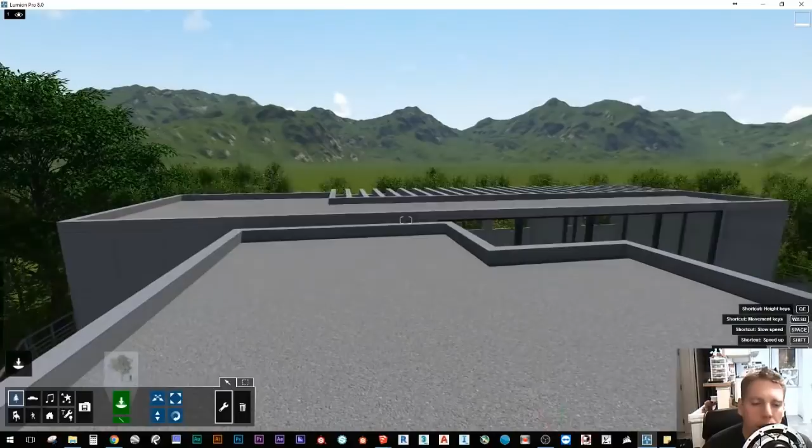So let's go ahead and jump into Lumion and take a look at this new feature. I'm going to show it really quick and explain a little bit more about it and how we're going to find some use. First off, we're in an example scene here in Lumion. I'm going to take this corner concrete right here.

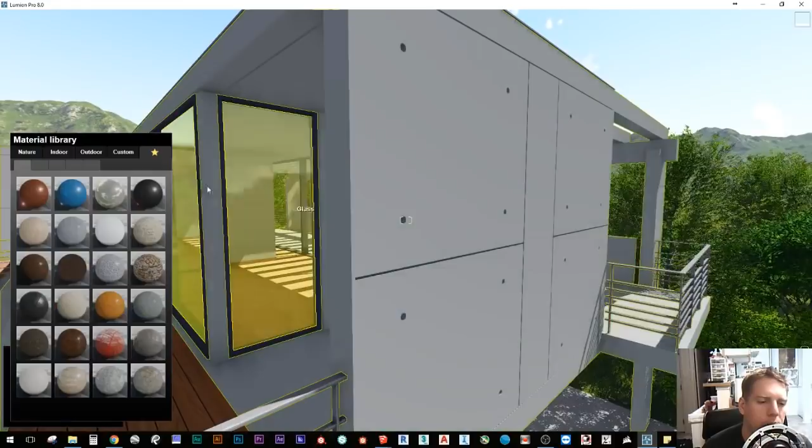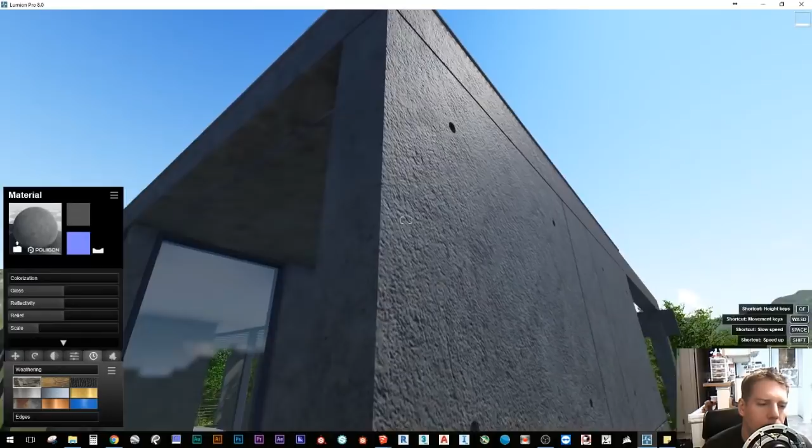Now we could pick any material in here, a standard material. In this case, let's go ahead and go with a concrete, one of the new Poliigon ones. Now selecting this material, everywhere there's edges that have this material painted on it, that's what we're going to affect.

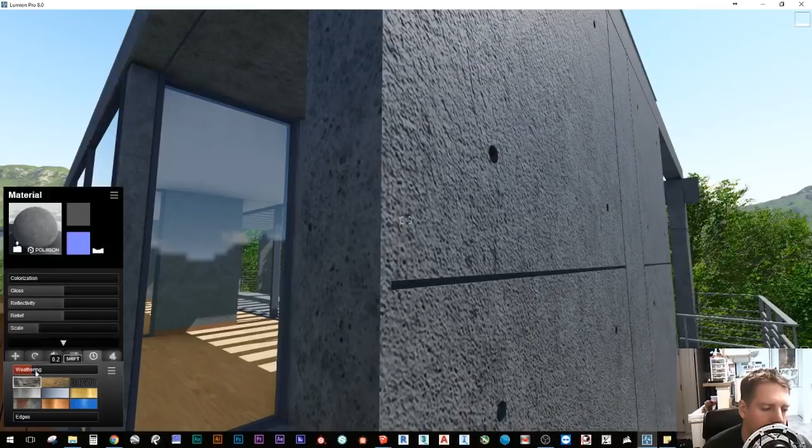So it works by material. Notice that we have perfect, crisp, fake edges here - that's definitely not something that occurs in real life. So here in the material editor, if you don't see these tabs down here, there's a show extended settings option. Make sure that's clicked, and we're going to head over to the little clock - it says weathering. Although we can weather like we have been able to since Lumion 7, let's get the scale down a little bit on there. That looks good. The slider right here for edges is right below - they just put that in there, and you are seeing the effect.

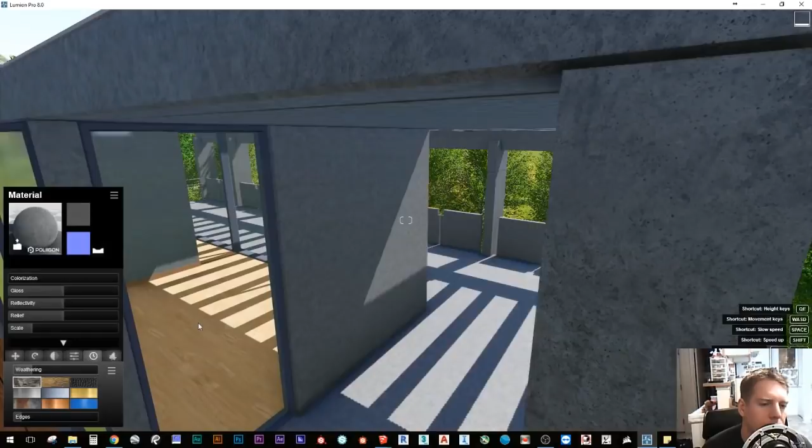Let's take a look at those circles where the snap ties go. So that's the effect. Now I'm going to talk about why this is so important and why this has really impressed me.

I'm going to be using it all the time. So I'm going to take a look at an article here. When I first started getting into rendering in Lumion, I looked up plenty of these articles that talked about how to increase photorealism in your projects, and a lot of them say very similar things. What you're going to notice on almost all of them, and in this case this is the first choice on their list, is you need to remove sharp edges.

It says bevel, bevel, bevel - whether we round edges, whether we chamfer them, whatever we need to do to make sure it's not a perfect crisp edge or razor sharp edge, because as it says here, there are no razor sharp edges in nature, and everything has some sort of curve to it. That's something that sets really high quality renderings apart.

Modeling things in Revit and SketchUp, oftentimes we're going to have those edges just by default, like our walls. But if you want to take it to the next level of photorealism, it's one of those things I used to have to do in my workflow. So I'm going to show really quick an example in SketchUp, what I mainly use, of how beneficial this is.

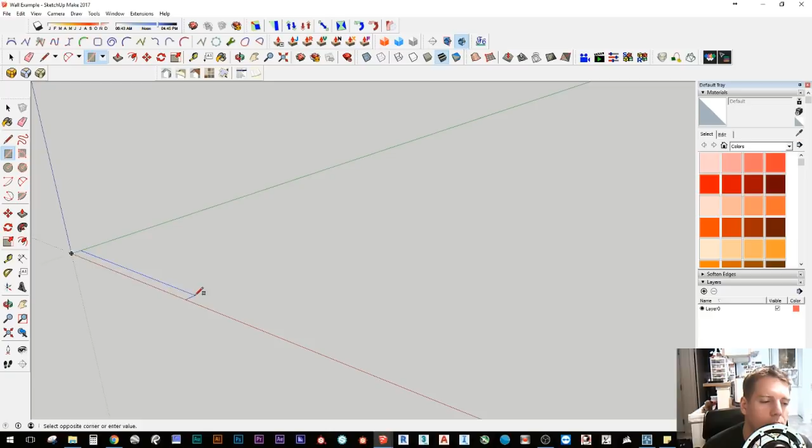So I'm going to go ahead and create just a really quick mock wall here. Alright, so there's our wall. I'm going to copy it and have the copy right here, so I'll keep that one exactly how we'd have it. You know, our projects look like this - they're going to have these perfect edges, and we've just kind of lived with that.

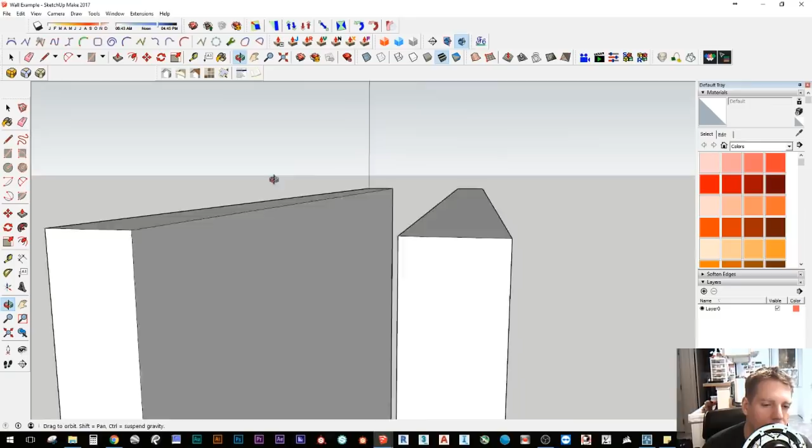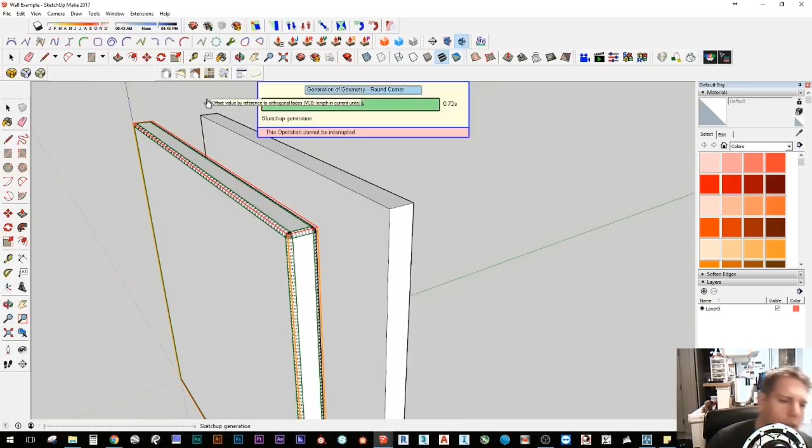What I've had to do to get that next step when I have time is I use a tool here called Round Corner in SketchUp, and then I've had to use void extrusions and other things in Revit to get the same effect. By doing that, I get round edges, round corners, and that's a little bit extreme.

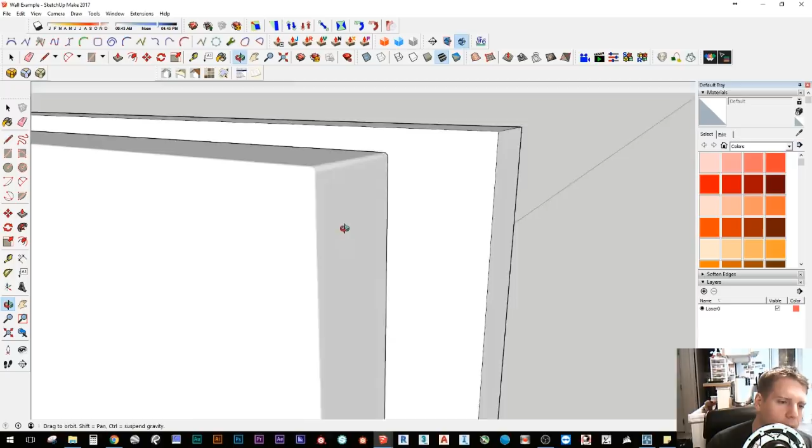Maybe I can do just something as small and subtle as this. Just that little bit can add that extra bit of photorealism on objects, because you take a look at a corner wall, it's not perfect sharp, everything is rounded.

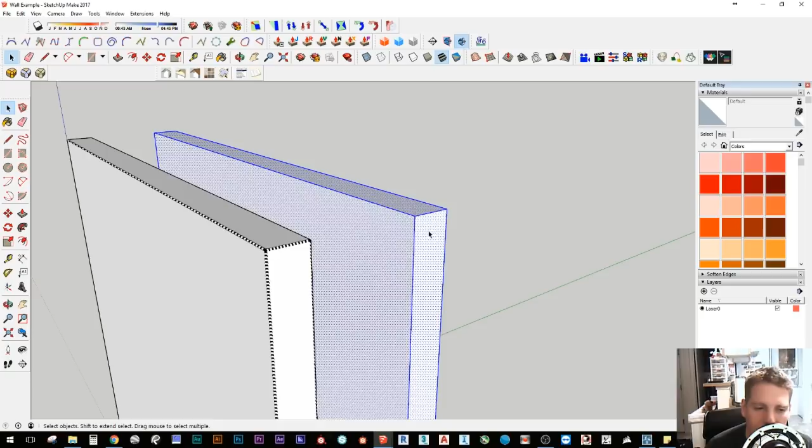But the drawback is by using this method, I've created much more polygons, so all geometry just gets heavier and heavier. This has 6 sides on it, 6 polygons, 6 faces, and this has probably hundreds, thousands. So you can see how this becomes a problem on projects, and it's been a problem for me.

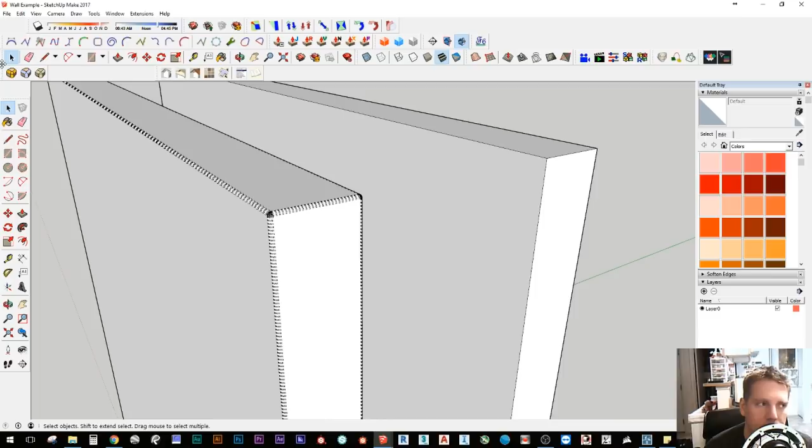Some things are worth it, personally, in my renderings. But let's go ahead and import this into Lumion, and I can show you how we can replicate this without really losing any frames or time with this new effect. That's going to hopefully show an example of the power of this. So I have that saved - let's get in some good sunlight, and I'm going to import those walls.

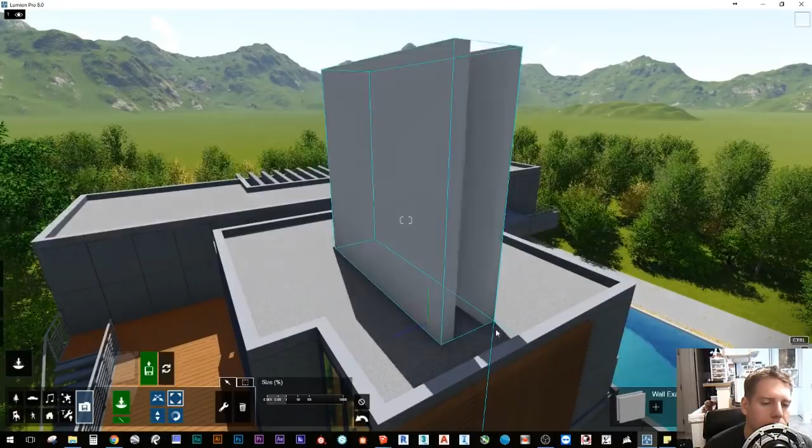There we are, a little bigger than I expected. Okay, I'm going to try to move a little bit more smoothly here, so I'm going to apply another material. Let's just do another concrete.

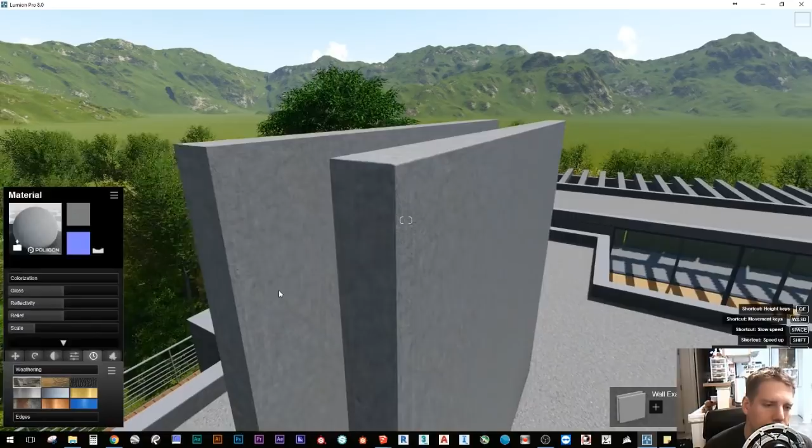Sure, that'll do. So here's our rounded edges, our chamfered edges that we did in SketchUp. Definitely looks much more realistic than this. Super sharp. That could be a weapon. Not something you'd want to brush against.

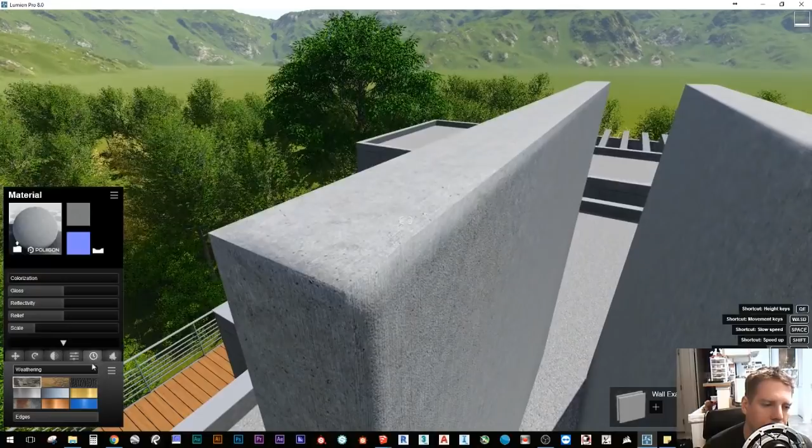But with the edges slider here, all of a sudden, it's not the case anymore. It does not look at all like it did before. And you can go pretty extreme, and when you start getting really extreme, you start to notice it's a fake effect. This is what I want to point out.

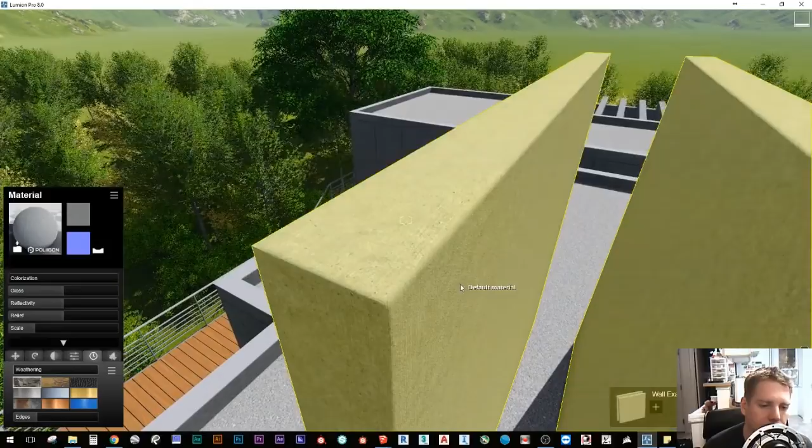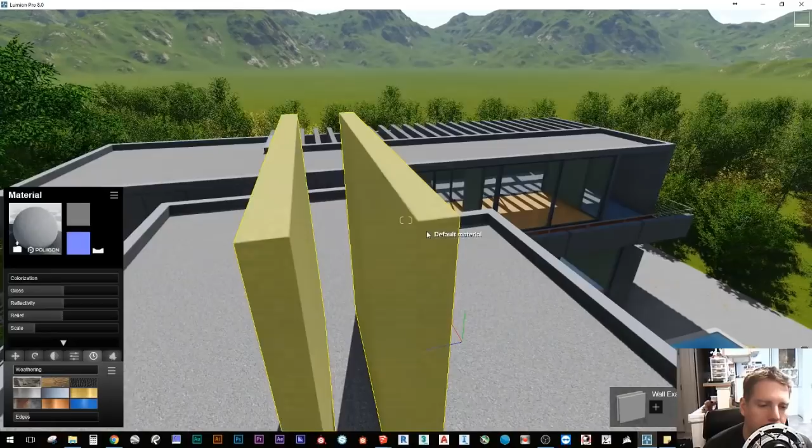The geometry, Lumion has not done anything to the geometry. That is still a hard edge. It did not add any polygons. It's very much like a normal map. Just as a normal map can tweak the lighting to make a flat surface—like this concrete right here—look super rough, or I should say super textured, this is a way of tricking the light to soften around the edges. Very good job on Lumion's end. And this, you know, this is hundreds, maybe even a thousand or so polys, and this is 6 polys still.

So just as we did it to any one of our old projects, we can jump on here and round these edges, and we can just get that extra bit of realism in our projects that much easier. And that's Lumion's goal, that's Lumion's mission, to make these things easier for us, to make our workflows quicker without bogging them down with more and more detail.

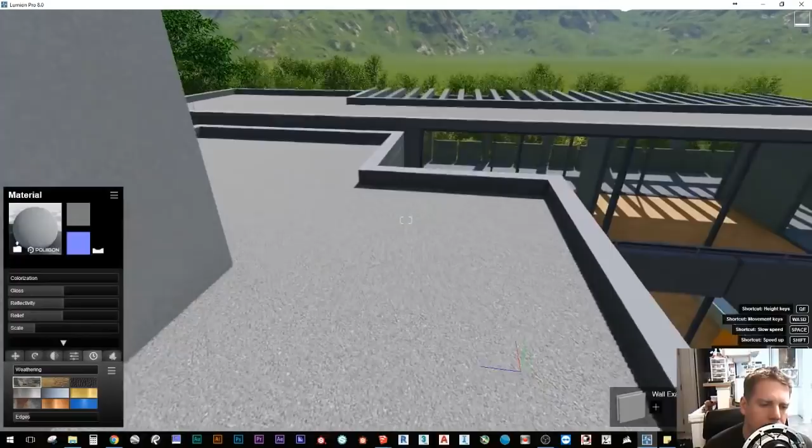There's some leather put on here. Let's change something else on here. I don't know, let's try that.

I want to point out too, lighting is crucial. If there's not the right kind of lighting on it, you're not going to see the effect, so just be cautious of that. Sometimes lighting won't reveal it the way you want. I've tried this a couple times on other objects and I'm like, oh, it's not working anymore, but it really has to do with the lighting. So just check that, and if you're not seeing the edges when you want to, try adjusting the lighting at a different angle.

So let's go ahead and round the edges there, and this really blocky furniture has gotten a lot smoother. There's that effect before and after, although it's making our buttons a little weird.

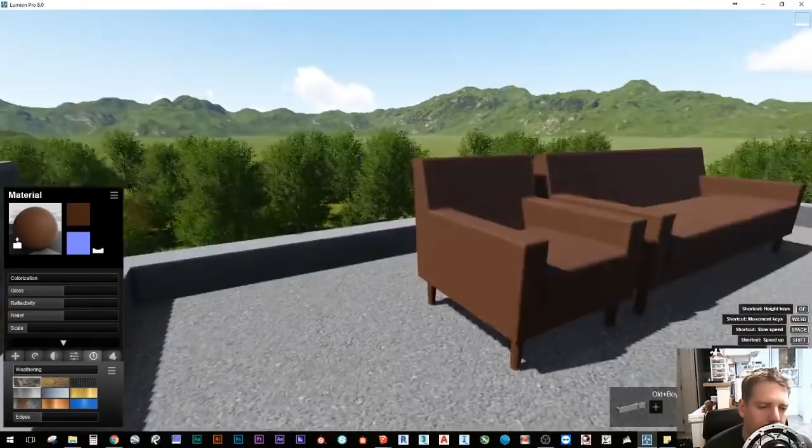That's really an issue of how we divide our materials in SketchUp, but you're seeing it right there. That's the power, that's what it's done right here, and it made some blocky, low quality furniture in Revit actually look halfway decent without having to do any extra work.

So anyways, that is the round edges effect. There's probably countless things you can think of now that this can really help and benefit. Remember, this does nothing to performance really, and it's as easy as selecting the weathering tab and sliding this.

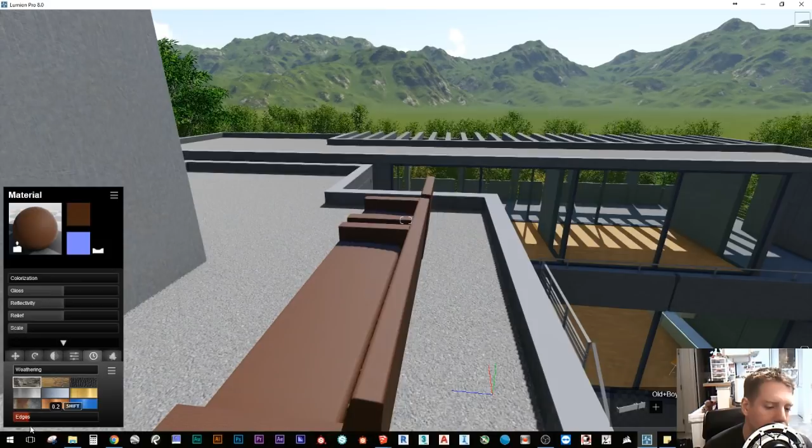So these changes are very much welcome in the new Lumion versions. I love these little extra things. I think it might have come from before it was able to detect edges. Like on wood, if you went high enough, you'd see how it detected the edges. I think they just refined that. They saw that potential there, refined it, and so we're the beneficiaries of that—this wonderful effect.

Alright, that covers everything on this effect I wanted to go over.